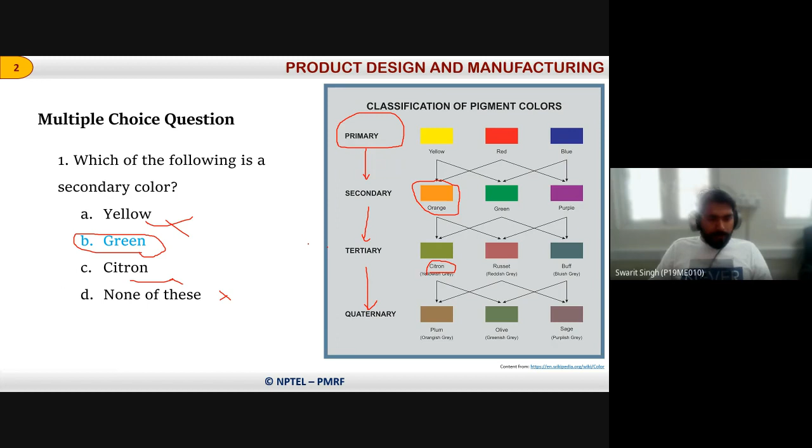Moving to the next question, question number 2 will be on your screen now. It says: name of the following series. This is a number series on your screen: 0, then 1, then again 1, then 2, 3, 5, 8, 13, 21, 34, 55, 89, 144, and so on. It is a continuous series. Which series does this number represent? There are different options.

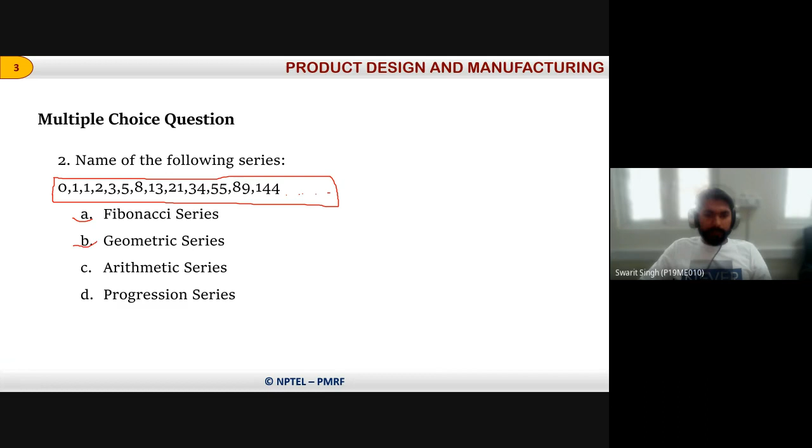There's this Fibonacci series, geometric series, arithmetic series, and progression series. We've studied all these series in class, I think 10th and 11th mathematics, so we have a greater understanding of that. What do these series represent?

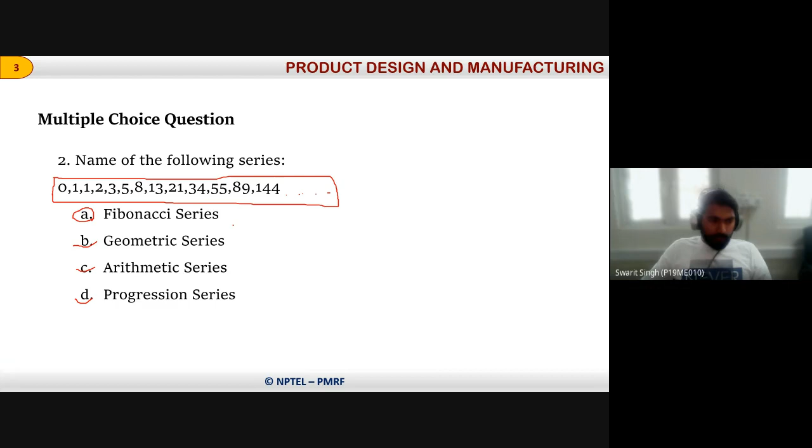Okay, so the answer is A. Yes, this is obviously a Fibonacci series. So as a reminder, what is the Fibonacci series? The formula for the Fibonacci series is Fn, the nth number, will be the summation of Fn-1 and Fn-2.

Suppose there's a default assumption: the first two numbers will be 0 and 1. To find the third number, you sum these: 0 plus 1 will be 1, so the third number is 1. For the next, fourth number, you sum the number before it and the number before that: 1 plus 1 gives you 2.

Then for the next number, you sum the number just before and the one before that: 2 plus 1 gives 3. Then add 3 and 2 to get 5. Following this pattern you get 8, then 13, 21, 34, like this. This is a Fibonacci series, and this is how it's constructed.

One important thing you may be missing: there's a golden rule. In the course you've studied about the golden rule. If you calculate it, the golden rule is the ratio of number 3 by 2, something like that. Sorry, let me recalculate - the golden rule is also defined here. So it is around 1.6, that number comes here. Yes, 1.618 is the golden ratio.

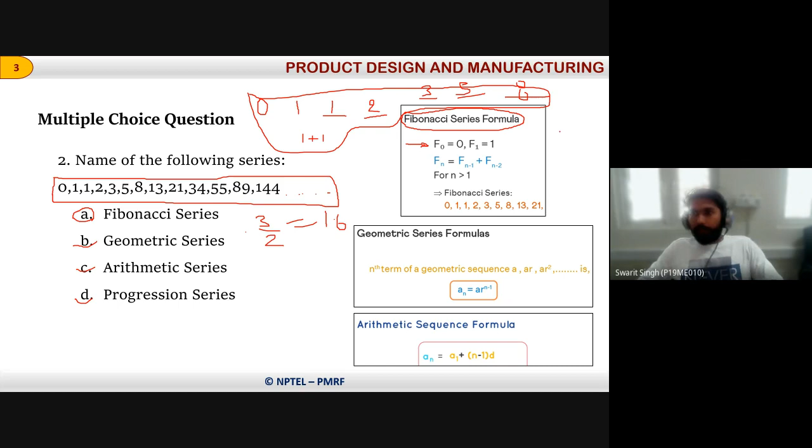This is what I was telling you - if you divide 5 by 3, you get around 1.6. Then if you divide 8 by 5, you also get the same 1.6. Yes, it is 1.6, around 1.6. After 0.618, it's not exactly the same, but you will get 1.6 for sure - you can try it. So this is the Fibonacci series.

Next is the geometric series. We've all studied about geometric series, I hope you can all recall it. What is the geometric series? In a geometric series there are ratios of numbers, so there's a ratio - R is the ratio number.

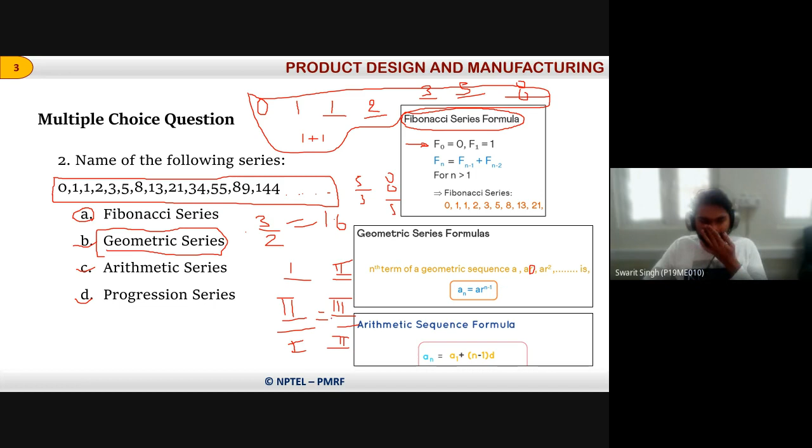There are two terms, at the first place and second place. If you divide the second place number by the first place number, it will be equal to dividing the third place number by the second place number. This ratio stays the same, and that ratio is R. The generalized formula for constructing any geometric series is An equals A times R to the n minus 1, where A is the first number, R is the ratio, and N is the place number. Through this, you can construct a geometric series.

Then there's the arithmetic series, which is a summation. Here instead of a ratio, we get a summation - there's a number difference. Suppose there's a first place number, second place number, and third place number. If you subtract the first place number from the second place number, you get some difference D.

And that same difference D will be here also. So if this kind of series is followed, it is an arithmetic series.

Then there is a progression series. Progression series is a generalized series which is similar to that arithmetic series, but it is a generalized term. So I hope you all got a fair idea about what these series are all about, and what is the Fibonacci series and how it is constructed.

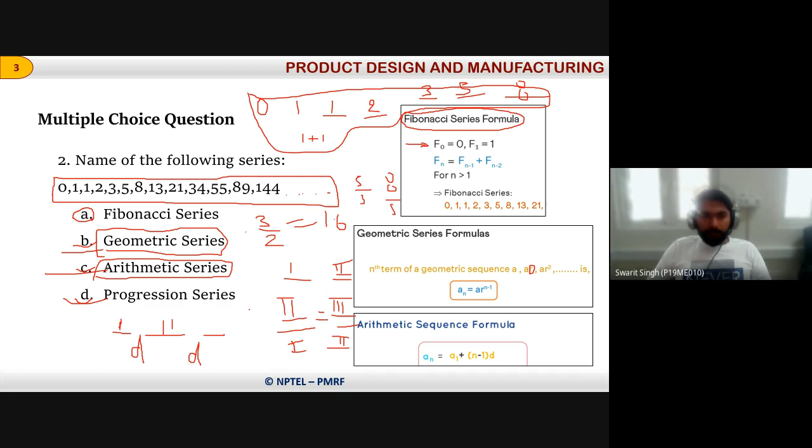Now we are moving to the third question. So the answer is Fibonacci series for this question.

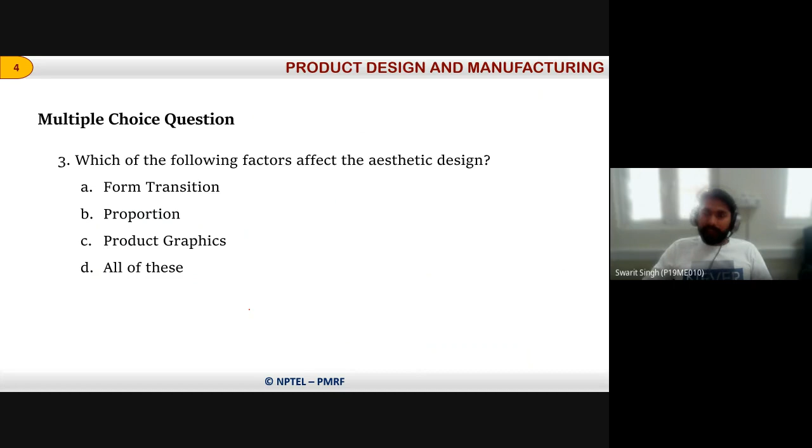The third question says, which of the following factors affect the aesthetic design? So you all are familiar with this term aesthetic design. Is it form transition, proportion, product graphics, or all of these? So we are getting the similar answer D. Yes, the answer is all of these.

So aesthetic design is something, a design which represents the look of the product. Suppose if you're going to design any product and it is not looking good. It is a very generalized statement that first impression is the last impression. So if by seeing your product the consumer or customer is not happy,

he will not be inclined to purchase your product at first. Later on, maybe if your product has the capability of solving some problem, or has good reliability, and some extra advanced application, then maybe he or she can purchase it. But just by looking at your product, he will not be happy if the aesthetics are not good. So aesthetic design plays a very crucial role in product designing.

Nowadays it is very important, because if you can monitor and recall how design has changed now. In the initial days, if you can see the example of a jug.

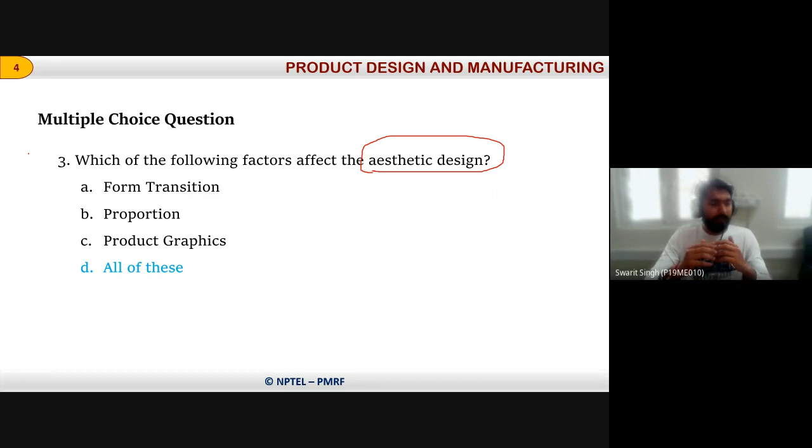If you are a sporty person, you will go with that section of bike. If you want more comfort, you will go with a flatter seat, something like that. The content, the purpose, is the same, but the aesthetic design, the look, is different, and because of that particular design, the cost is different, and different sections of people are attracted toward different designs of the vehicle. So this aesthetic design is very important, and it's a crucial factor for any product design and manufacturing and other places. So the answer for this question is all of these.

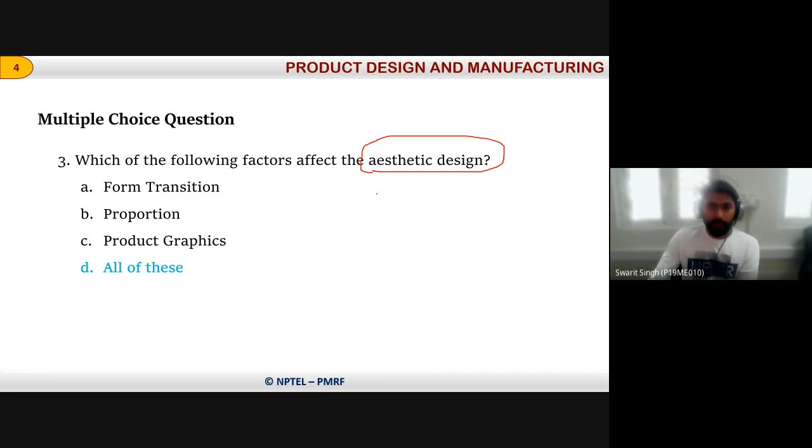We are moving to the next question. Question number 4 will be on your screen now. Again, it's a color question. It says, which of the following color is of calming type color?

There are colors which we say are calming type colors, meaning after seeing those colors, we feel soothing. This was also discussed in class, like why we need different colors. This color aspect also comes under the aesthetic part.

What I can say is that we have different color options. If you look at a phone, you can find black color option, white color option, red color option, so as per what suits you, what you want, you purchase that. Like t-shirts also have different colors, and people prefer different sections of colors.

Depending upon the occasion, people wear different clothes. If you are going for a marriage, people wear bright clothes. If going for a party, there are shiny clothes and attractive clothes that catch your eyes. But if going for a condolence or funeral, the color is not much brighter; people do not prefer much brighter colors there.

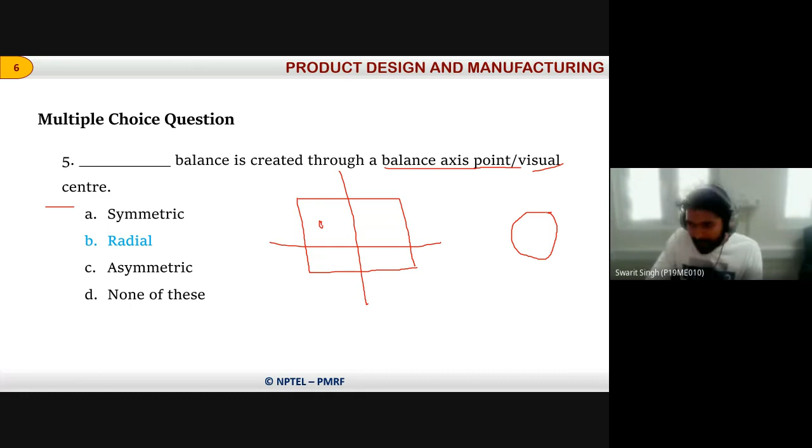So if it passes through a center, all these parts are symmetric, right? Suppose this is a circle, like a ring or a tire of a vehicle. This is the axis around which the entire design is structured.

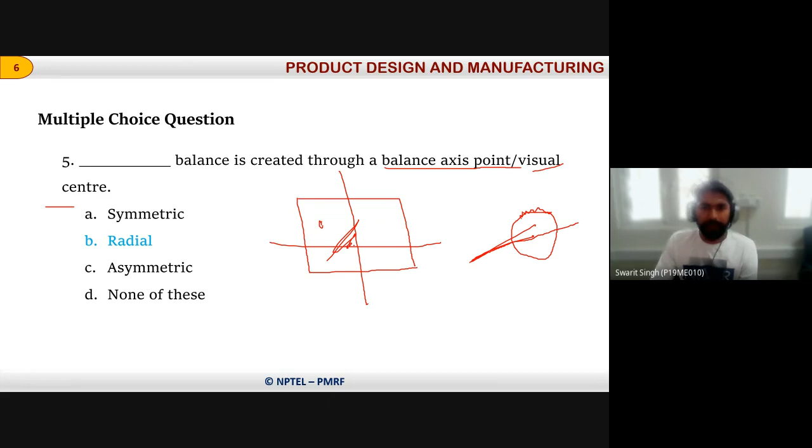These designs are symmetric towards this axis, the axis passing through its center. This is called radial balance. In a symmetric figure like this one appearing here, the radial balance is created through a balance axis or visual center.

Now question number 6 is on the screen. It says, which of the following is the reason that a customer will purchase a product? Suppose you are a designer or manufacturer who has manufactured a product. From a manufacturer's perspective, what qualities are required in your product so that the consumer gets attracted and purchases it for sure?

Before manufacturing, all these things need to be kept in mind - why we are manufacturing the product, why this product is required. Certain questions should be answered before the product is manufactured for gaining profit. Otherwise, you can unnecessarily end up manufacturing a product which is not getting consumed in the market.

The options given here are that the product manufacturer has a great reputation. Is it important that a product manufacturer has a great reputation and only then will the customer purchase the product? It is not always true, right? Sometimes reputation will work.

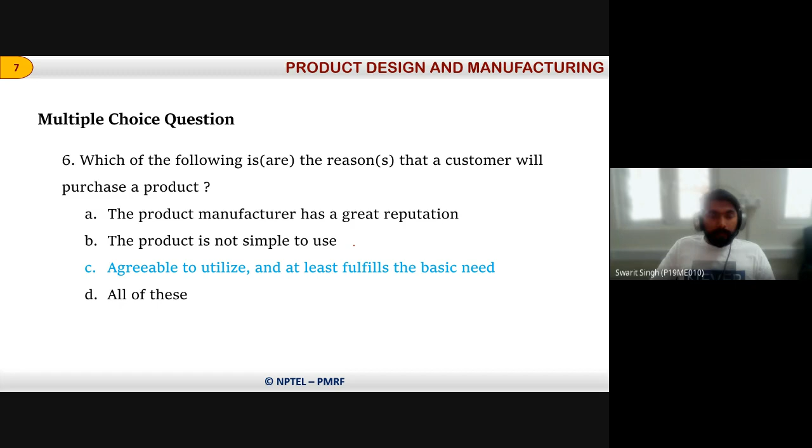Moving to the next question. Question number 7 will be on your screen. It is a true false type question. The statement is: performance of the product should specifically fulfill the customer's most vital necessity.

Performance of the product should specifically fulfill the customer's most vital necessity. So what is the necessity of a customer from a product? Should the product perform or should it not perform? We got a sufficient number of answers saying A, yes. So the performance of the product is the only thing a customer wants. If the product is not performing, of what use is it for a customer?

That may be a valuable thing for the manufacturer who has manufactured that product - it may have some value in the eyes of the manufacturer, but for the product utilizer, the consumer, the customer who is purchasing that product, he just wants performance from that product. Everyone wants performance from the product they purchased. If you purchased a laptop today and tomorrow it goes dead, you will definitely not like that. You want your laptop to last long, perform, and do your task. So performance of the product specifically should fulfill the customer's need, and that is the necessity a customer requires. So this is a true statement.

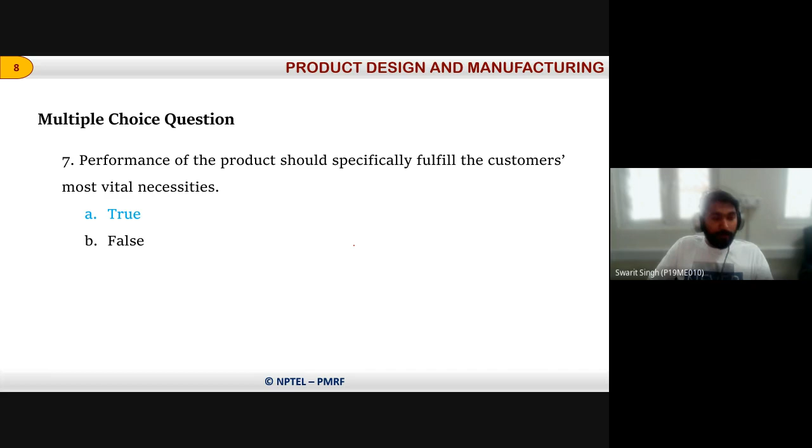Now question number 8 is on your screen. It is again a fill in the blanks type question. It says: which are sudden attributes of an item that make it one of a kind and recognize it from the opposition - is it exciter type, expecter type, unspoken type, or spoken type? Which type of attribute makes a product one of a kind and recognized from the opposition?

These are the attributes which a customer has from a product. If you go to buy a product, you have some expectation, and with that expectation you go to the market. Then when you go to that particular shop, the retailer starts giving you options. If you go to purchase a mobile phone, at the shop you will find different mobile phones. When you first thought of purchasing a mobile, you had some basic expectations - your mobile should have a camera, touch screen, good sound quality, Bluetooth option, 5G. Right now 5G is booming, so people will prefer 5G.

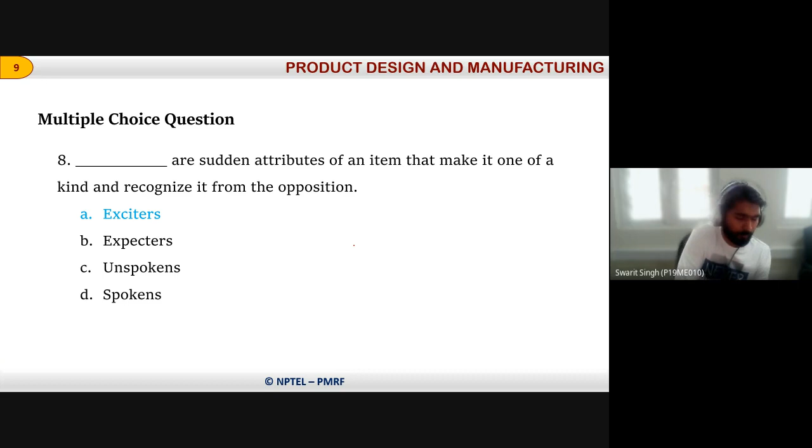So in this context you can understand what are the attributes of a product that is required by a customer. These are very basic examples that I'm trying to use to explain the concept. I hope you are understanding these things, and it is helpful in understanding the concepts, right? So the answer for this question is exciters only.

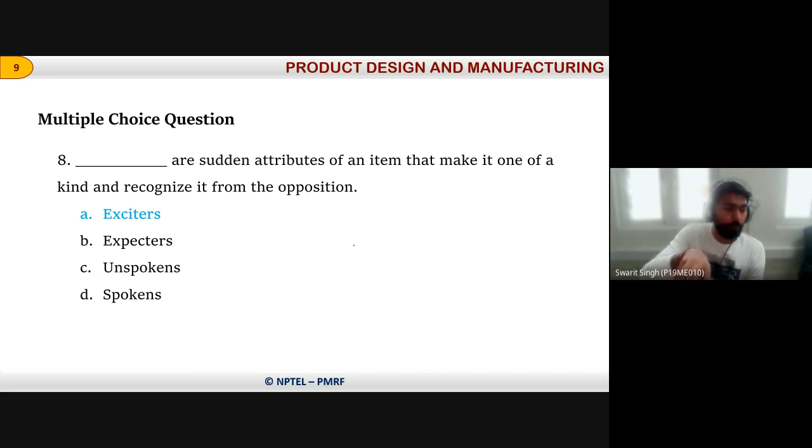So as Nikhil has said, exciters are the special, exceptional delighters which should make your product stand out from others. Yes, so these are the different levels of features that make a product look or appear very different in a pool of similar kind of products, right?

Suppose you are going to manufacture something, like this headphone. If your company is going to manufacture this headphone, you need a better idea of what the expectations of the customer are, what new features people want, what things attract a customer, what type of headphones are very popular in the market. Only then will you be ready with a unique type of product that goes to the market and people will appreciate it, right? So this information is very crucial at a very early stage when we are planning for producing a product.

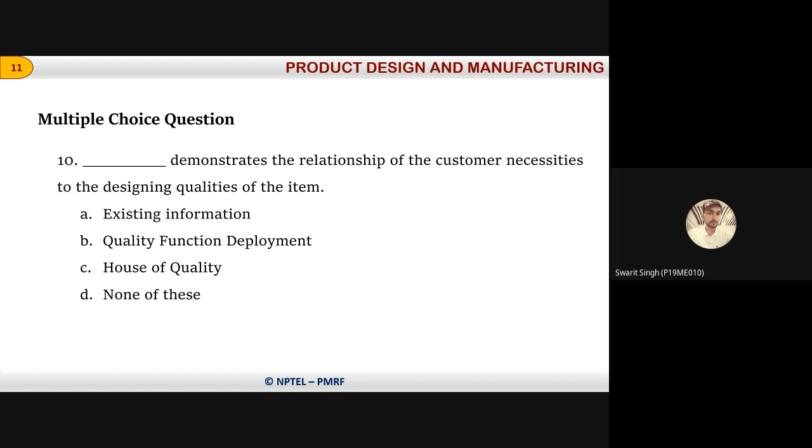So we are getting some answers. Answers are B. So which of the following demonstrate the relationship of customer necessities to the designing quality of the item? Options: existing information, quality function deployment, house of quality, none of these.

So we got some answers, B only, and this time one answer is correct only. House of quality is something which demonstrates the relationship. If you see the last lecture, house of quality was discussed in a very elaborate manner. House of quality gives you certain values, certain matrices which relate the expectation or desire of a customer with the quality of the item. So house of quality is the thing which demonstrates the relationship among customer necessity and the designing quality of the items.

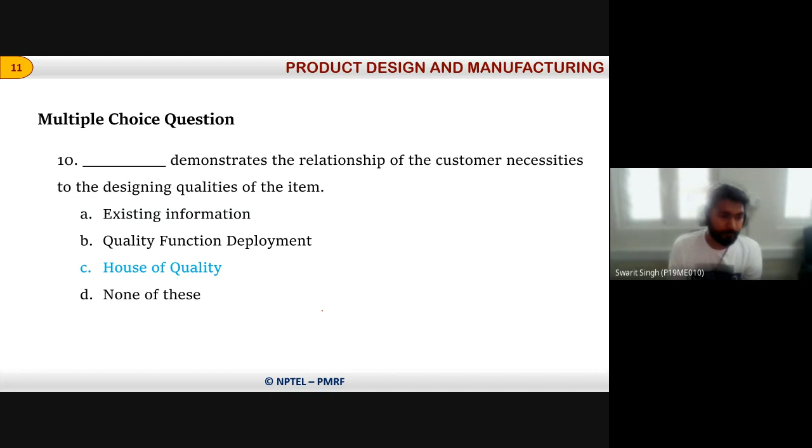So for this session, these are all the questions that I have. This week, people didn't ask any great question on the discussion forum. Only two people asked the same question, that they had a doubt in quiz question number 4. Some color was there, and then their options were incorrect. They were thinking, and the clarification is already provided there. So I haven't taken any question from the discussion forum.